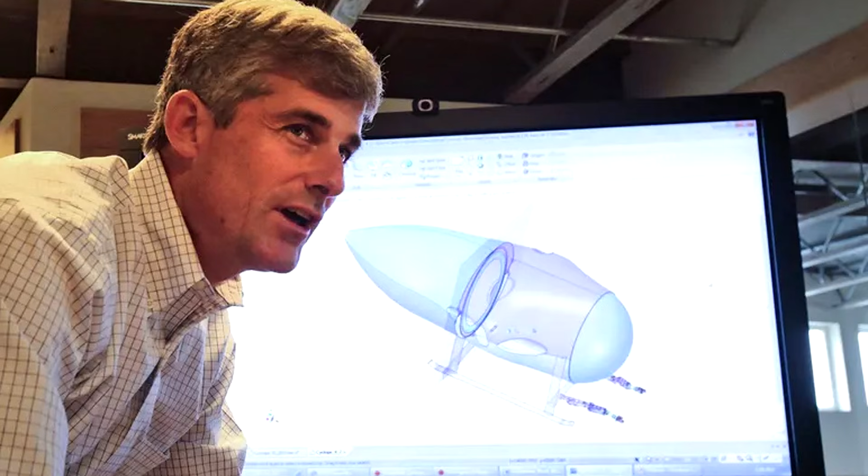The Coast Guard final report was released on August 5th, 2025. It was 335 pages long and had a great deal of information that helps explain why Stockton was so confident in both hulls that he built. In this video, I'm going to tell you the story about his complete confidence in the second hull and how and why Stockton came to this conclusion.

The strength analysis he was presented was excellent. The MBI final report states it this way. In summary, the safety factors reported for the final Titan hull design were well above the required thresholds for aerospace applications, ensuring a high margin of safety under the anticipated operating conditions.

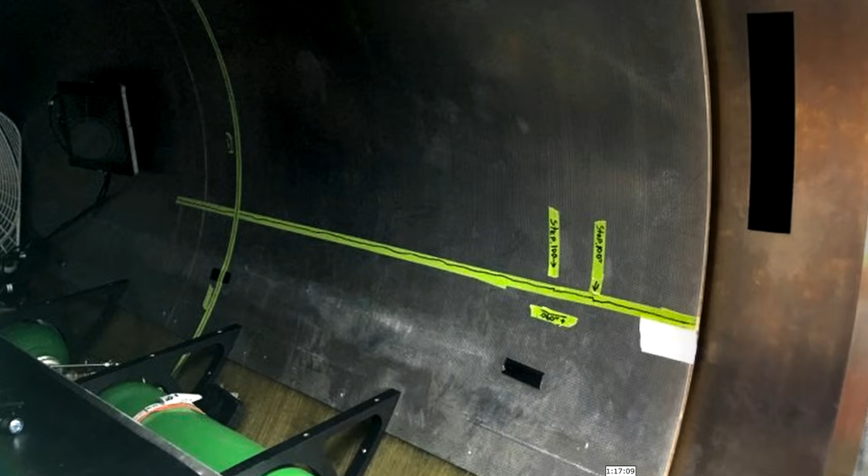In a previously released Part 1 video, I told the story about why Stockton had confidence in the build of his first hull, the one that cracked in the Bahamas. Stockton had even more confidence in the second hull, the one that imploded. He was told by carbon fiber engineers that this hull was ready for Titanic depths.

When I review the basis for the engineers' conclusions and Stockton's decision-making, I think you will be shocked by the process. Stockton really thought the second hull was indestructible. And he told us that it was basically indestructible.

The Coast Guard public hearings left unanswered questions about who helped OceanGate engineer the second hull. Phil Brooks was the only OceanGate engineer employed at the time the second hull was being built that testified publicly, but he was a software engineer. His testimony was very important and mentioned some interesting things about the time period of building the second hull, but his story alone never filled in all the blanks.

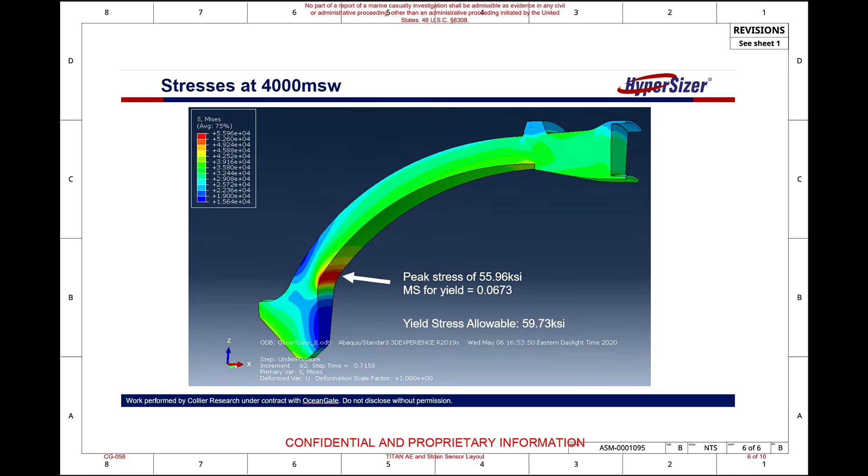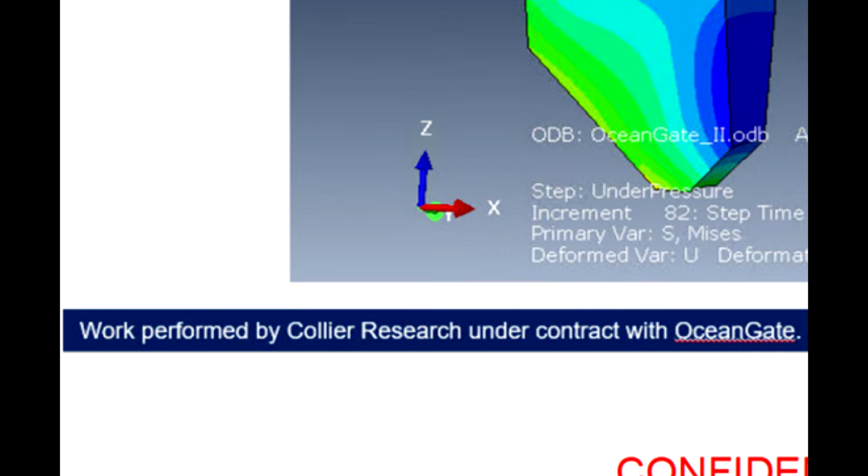He never even mentioned the main company Stockton had hired to do the computer analysis of the second hull, Collier Aerospace. I will tell you this, Collier was the Boeing of the second hull. I suspected Collier's involvement because in the MBI documents concerning strain gauge placement, there was a single image that had the Collier name on it, but that was it. It was the only clue.

We had to wait for the 335-page MBI final report to learn about Collier's work. And then, the day after the final report was released, the Coast Guard released additional information, 1,430 pages of transcripts. These transcripts included some private Coast Guard interviews. A significant interview was with Dan Scoville, and information provided here allowed us to completely figure out the second hull story. Let's jump right into understanding the story of Collier and the second hull.

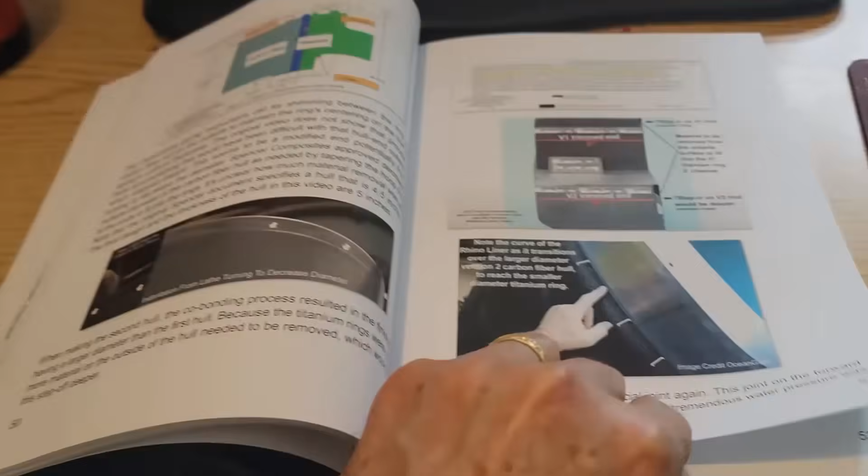So no one from Collier testified publicly at the hearings, and the 1,430 pages of transcripts do not include an interview with a Collier representative. It's unclear if the Coast Guard spoke to Collier or if Collier just responded in writing to specific Coast Guard questions. I am sure that Collier was all lawyered up because they were intimately involved with the second hull and they had no maritime experience.

Dan Scoville was made the director of engineering after Tony Nissen was fired, so Dan was the second director of engineering and involved with building the second hull for Stockton. In his private testimony, Dan states that he found out about Collier in a trade magazine because they advertised themselves as experts in carbon fiber finite element analysis. Later, he would also state that NASA had worked with Collier and had confidence in them.

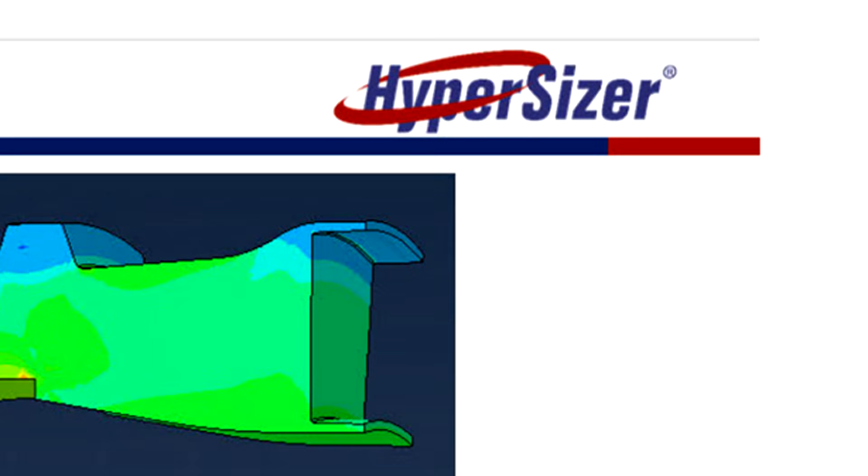Dan and Stockton had to hire Collier to do the FEA calculations for the hull because there was no one at OceanGate who would have been able to run their HyperSizer software if they bought the software product outright from Collier. Here's how Dan described it in his testimony transcript.

So we did a finite element analysis on that. I don't have the skill set to do that. Neither does anyone at the company, at least not at this point. So we hired a third-party company to do that. So we called a company called HyperSizer.

He meant Collier. Their software is called HyperSizer.

I found them in a trade publication. They specialized in FEA for carbon fiber. So they sell this product. I called them up and said, hey, nobody here is going to run your software. This isn't our gig, you know. We're not going to be able to buy your software and run it because we're not going to be able to get in and get the result out because we don't know what we're doing.

Even though Collier was an aerospace company, Dan states they responded like this.

Would you guys please contract with us to run your own software for us and analyze our hull? They thought it was a cool idea. They liked a different thing to work on because, you know, they work aerospace.

Here are the two requests for proposals and purchase orders from OceanGate for Collier to do the FEA with their HyperSizer software.

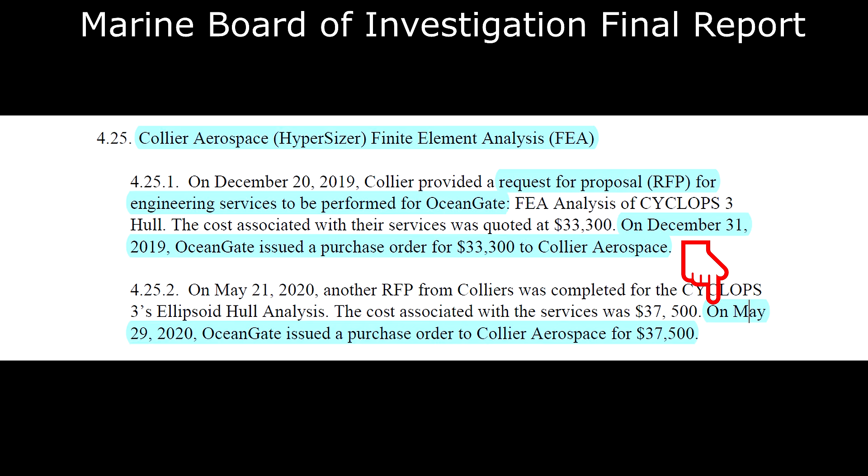This is for the second hull, referred to here as Cyclops 3. Request for proposal for engineering services to be performed for OceanGate. On December 31st, 2019, OceanGate issued a purchase order for $33,300 to Collier Aerospace. On May 29th, 2020, OceanGate issued a purchase order to Collier Aerospace for $37,500.

I want to interject an interesting aside here. During the same time period, in the early 2020 time period, for some reason, OceanGate was simultaneously reaching out to Boeing again, but Boeing ignored them. Listen to Mark Negley. I think the last time Boeing was in discussion with OceanGate was March of 2020, where we declined to respond to a request for proposal. I have a feeling Boeing did not want to deal with OceanGate and Stockton any longer.

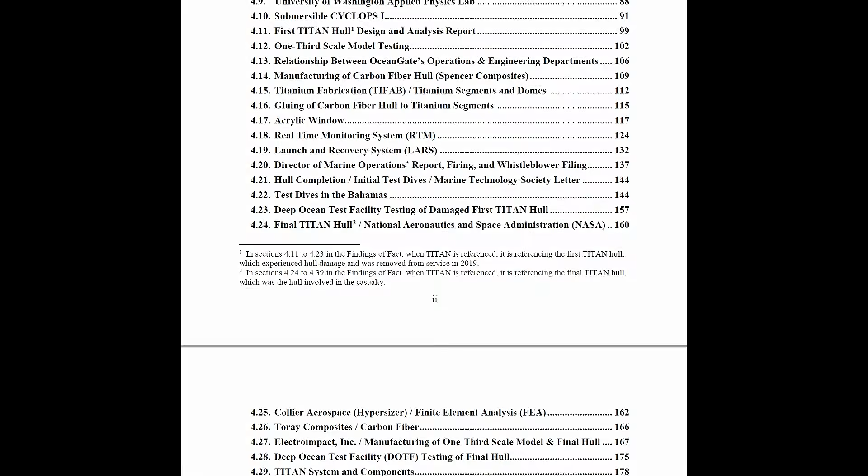Now it's time to go through the MBI final report and review the collaboration between Collier and OceanGate. Again, we don't know exactly how Collier provided the information to the Coast Guard, but this is the content in the MBI final report. In terms of engineering this mission-critical structure, the carbon fiber hull, the information is shocking.

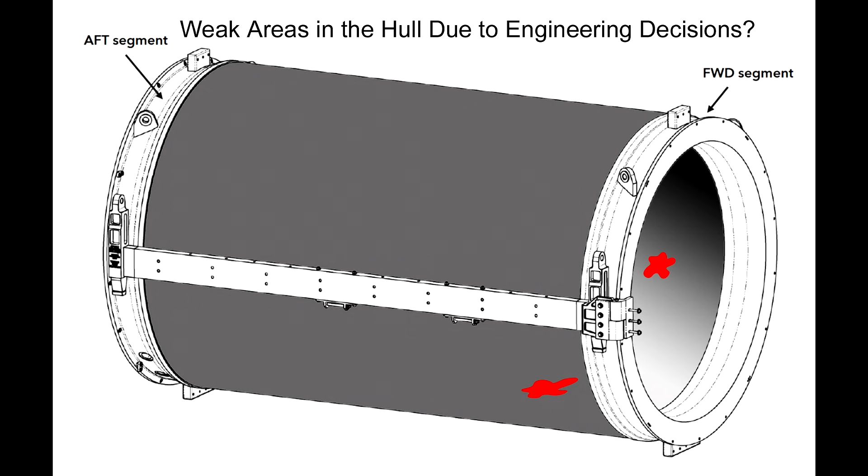As I go through these entries, try to understand how Collier, a professional engineering company, felt they were in a position to draft an engineering conclusion about the predicted strength of the hull and present it to OceanGate. And from OceanGate's perspective, how could they possibly trust the analysis? Because with an analysis such as this, you must have good data input to get reliable data output. You will see what I mean soon.

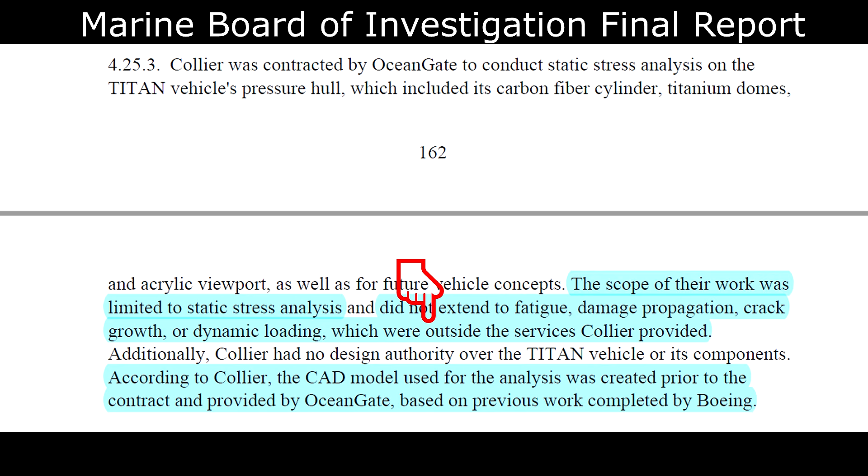The scope of their work was limited to static stress analysis, did not extend to fatigue, damage propagation, crack growth, or dynamic loading, which were outside the services Collier provided. According to Collier, the CAD model used for the analysis was created prior to the contract and provided by OceanGate based on previous work completed by Boeing. So all the work was static, nothing dynamic, and OceanGate passed to them some of the work done by Boeing, which must have been information from the 2013 feasibility study.

The emphasis on static analysis is repeated. The first contract included an FEA with both 2D and 3D models. This included evaluating the deformation of the vehicle under static loads, analyzing the interfaces between carbon fiber and titanium, and determining the theoretical performance envelope of the pressure hull.

Collier did do something smart. They knew they had to have metal domes to test the scale model hulls because during the Spencer scale model tests, the carbon fiber domes always failed. For the 1/3 scale tests, Collier designed a steel ring fixture to mimic the deformation profile of a titanium end dome. After the first 1/3 scale model test, Collier analyzed the failure load and measured wrinkles, attempting to adjust the finite element model stiffness to match the observed failure load.